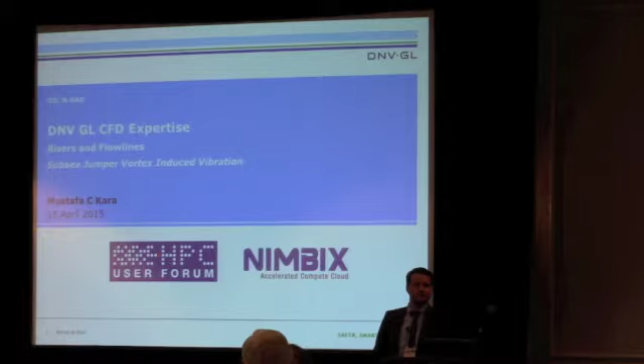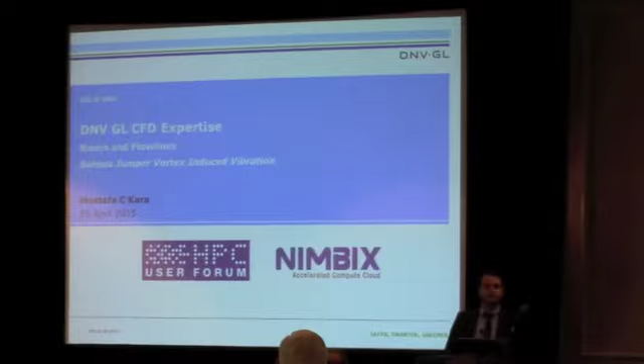I came from DNV GL. I am an engineer, basically a CFD engineer at DNV GL. We have an office in Houston, Texas, and we are in the oil and gas business. So today I'm going to talk about HPC applications. We used the Nimbix cloud system, cloud computing, for a couple of our studies that we have conducted through CFD.

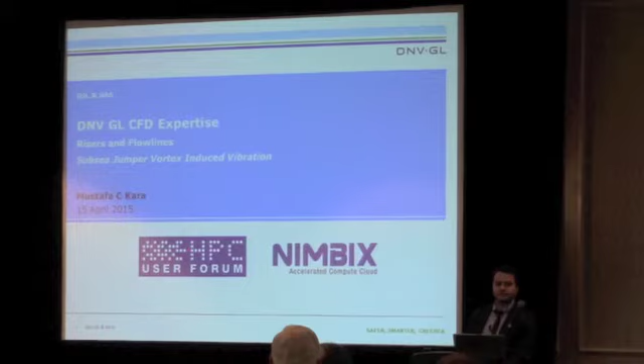My background: I was a PhD student at Georgia Tech, and I had a structural engineering background, did fluid-structure interaction, and got familiar with CFD and fluid mechanics during my PhD. Two years ago, I joined DNV GL. Now we have a riser and flowline section that does independent analysis and verification for subsea equipment. This is our first time at the HPC User Forum.

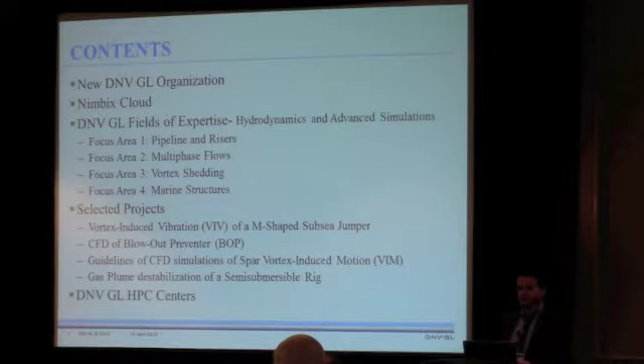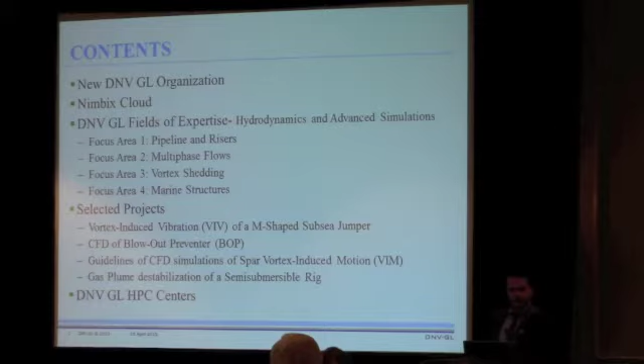I will first talk about DNV GL as an organization. Probably most of you don't know or have little idea of what we are doing. Then we'll move to the Nimbix cloud solution that we have used for a couple of applications, and our CFD fields of expertise on pipelines and risers, multi-phase flow, vortex shedding, marine structures. Then I will show some showcases through selected projects that we have conducted.

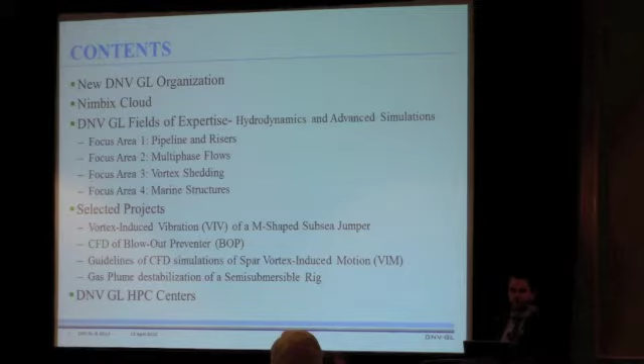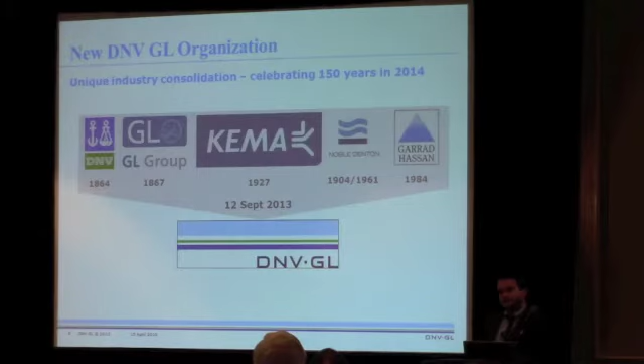Legacy DNV was headquartered in Oslo, Norway, and GL was headquartered in Hamburg, Germany. They merged in 2013. They include a couple of other companies like KEMA in energy, Noble Denton in maritime, and Garrad Hassan for renewables and energy. Now the company is called DNV GL. DNV GL is an independent organization, so we are third party verification. We do technology qualification.

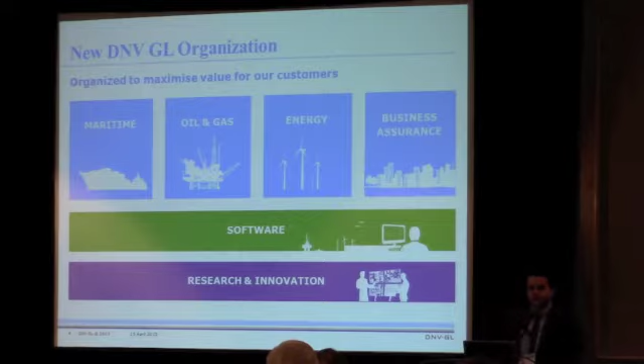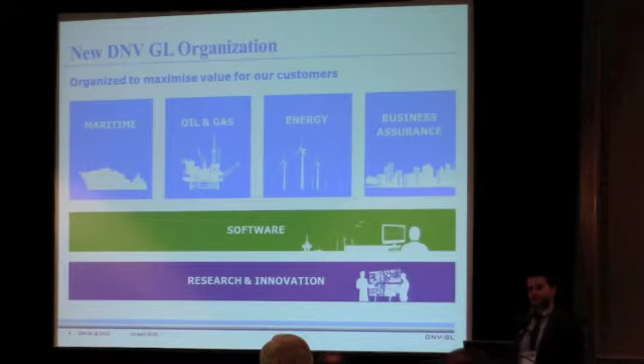We are in different units: maritime, ship hydrodynamics, stability, and transportation. Oil and gas, from the bottom of the sea floor to the topside of the structure. Energy, renewables, wind; you can think about wind turbines and wind farms. Business assurance, and DNV also has software. They have been using it for the maritime and oil and gas business. It is based on potential theory, not computational fluid dynamics. DNV is a unique organization that invests 5% of its revenue into research and development each year.

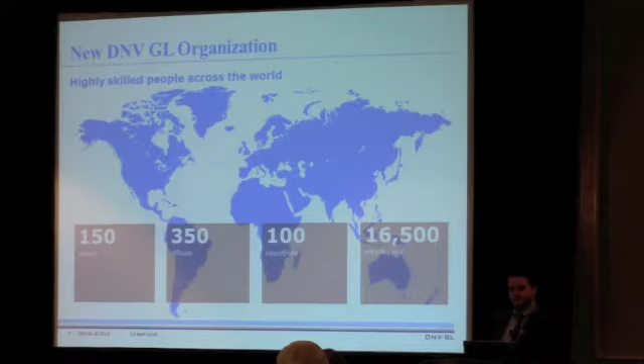DNV GL has been around for 150 years in the certification business. We have 350 offices around the globe, and now after the merger with GL, DNV GL has around 16,500 people.

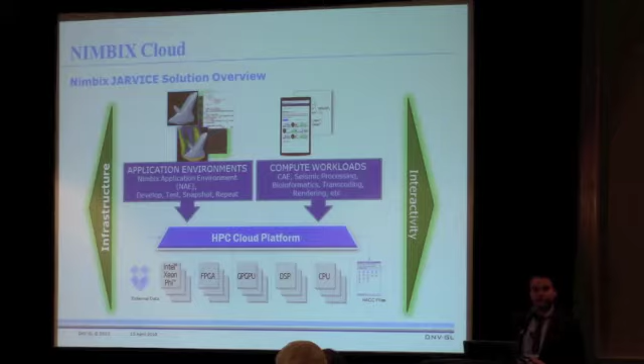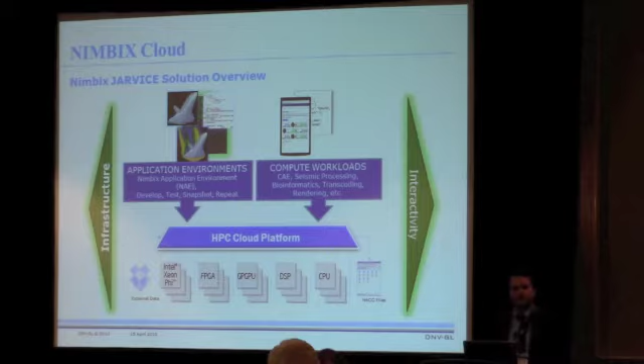Let me briefly talk about Nimbix Cloud. We had to run CFD studies, and of course big scale studies, and at that time we didn't have the computation power. Although we have the software, we didn't have the hardware. So we chose Nimbix Cloud because it was easier for us. They have a cloud operating system called JARVICE, where you can run your jobs in batch mode or interactively. It's a software as a service company for end users, so point and click applications.

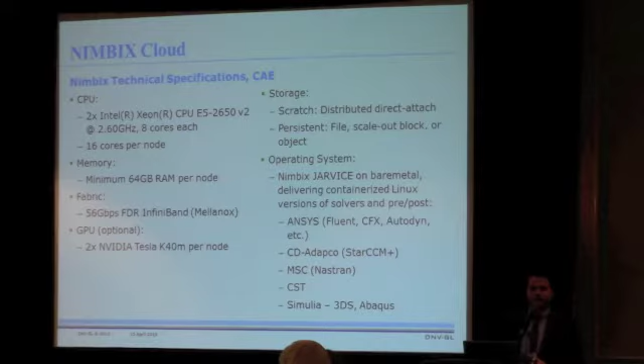Nimbix currently has 1,200 cores. There are 16 cores per node, and each node has 64 GB RAM. Through Nimbix JARVICE, we are able to run CAE software like ANSYS Fluent and CFX for CFD and STAR-CCM+ for CFD. Then we have Nastran and Abaqus for FEA and ANSYS Mechanical for FEA. Those are important because in the subsea environment, when you look into the behavior of structures, there's vibration. So you have to couple CFD and FEA through fluid-structure interaction.

Our first focus area is pipelines and risers. Risers are basically pipelines that take the oil from the sea floor and carry it to the top surface of the floating platform. There is a growing desire to install subsea equipment at deeper depths with loose support, which accounts for temperature effect changes and well growth.

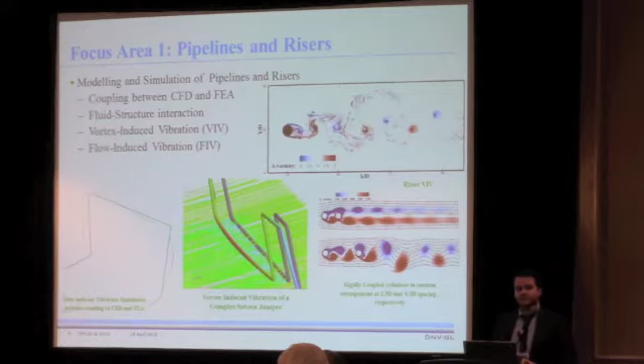When you have longer and deeper seas, now we are talking about 10,000 feet of sea depth, the riser length is increasing and it's very susceptible to vibration due to ocean currents and the motion of the topside platform. Vibration is very important because it may induce fatigue at the end of the day, which may cause collapse of the structure.

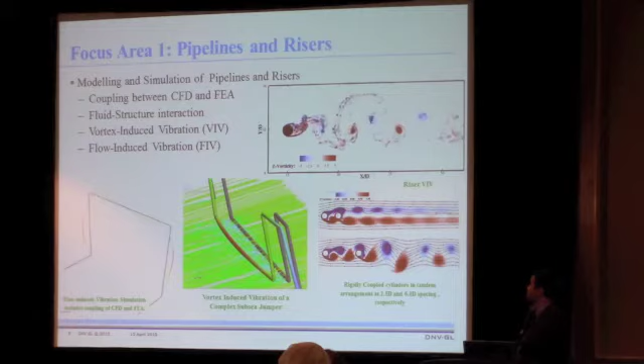So you can see here on the top right side, this is an example of vortex-induced vibration. This is a free vibration. Basically, the cylinder is moving in free motion, and the CFD solver and the equation of motion, which is a structure solver, are coupled two-way.

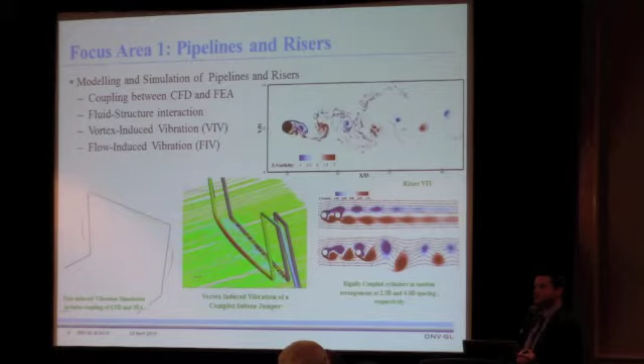So vortex-induced vibration occurs when the vortex shedding around the structure has a frequency. When this frequency of the vortex shedding equals the natural frequency of the structure, then the structure starts moving, basically vibrating. This is very important because this cyclic vibration may cause fatigue to the structure.

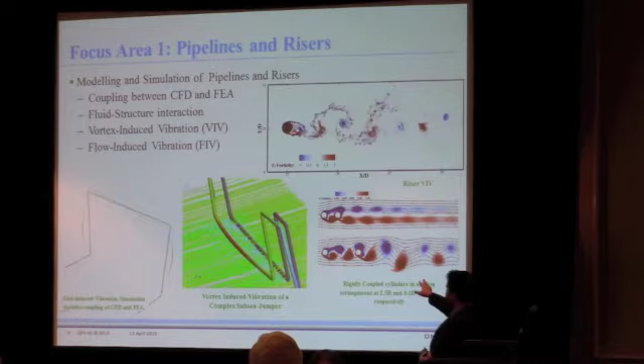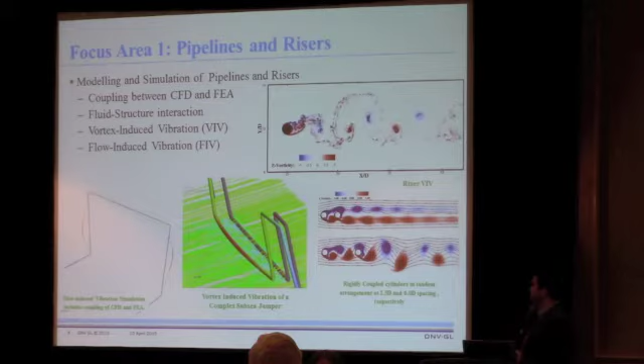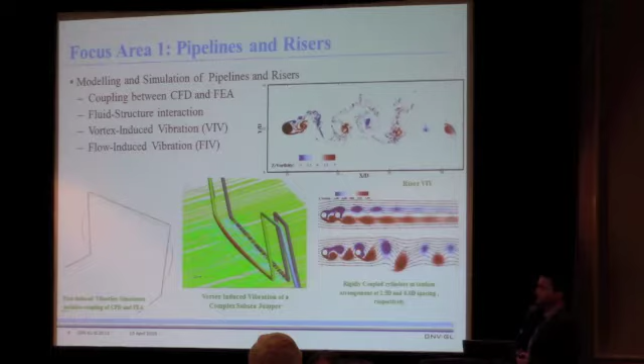So this is based on basic external flow, and you can think about cylinders in tandem. Those can also vibrate. But you also have flow-induced vibration, so there's also flow inside the pipe, right? The oil or the hydrocarbons. So when there's a slug flow coming into the subsea jumpers, the structure can also vibrate. Those vibrations are coupled using CFD and FEA solvers together.

Multiphase flow. The multiphase flow includes multiple components of flow, basically. You can have gas-liquid, external flow and internal flow. If you look at flow assurance, you are trying to investigate the asset integrity of your pipeline, because you don't want to stop the production, right? When the hydrocarbon gets into the pipe, there are other problems occurring, for example erosion or corrosion. You are able to model those problems, assess the forces and mitigate the problems using CFD by introducing better designs.

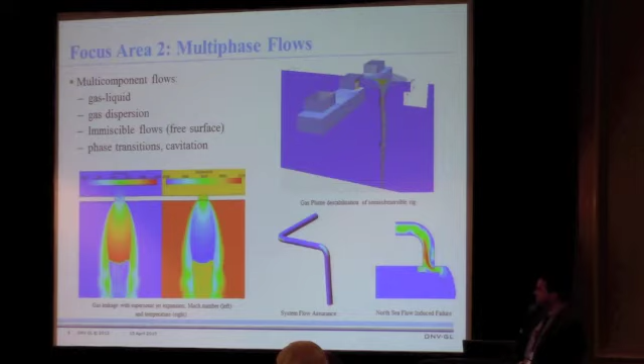So vortex shedding is our core business, and where our strength is, basically. Accurate predictions of structural integrity require accurate predictions of the loads on the structure. It requires highly skilled hydrodynamics professionals, and DNV is a very advanced developer and user of all types of software for predicting vortex shedding.

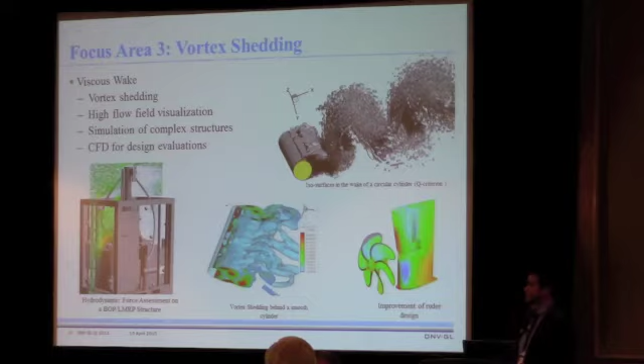Vortex shedding may happen on a simple structure like a cylinder, but the vortex is highly complicated to investigate because of the turbulence and turbulent boundary layers at different current speeds. Then, if you look at a complicated structure like a blowout preventer, assessing its hydrodynamics is also important. Because this blowout preventer is sitting on the wellhead, you don't want a well blowout. There's a huge structure sitting on the wellhead, and you have to calculate in the design the added mass forces or hydrodynamic forces acting on the structure.

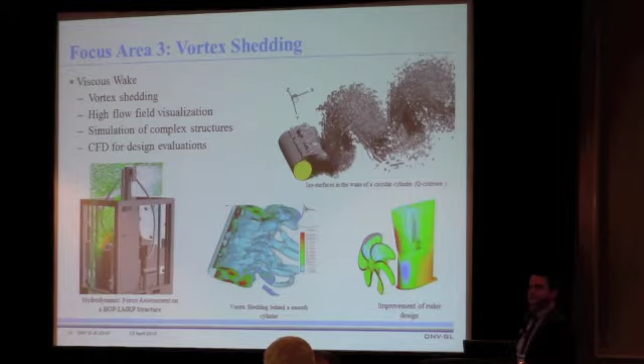You can do design improvements using CFD. You can see a picture of rudder design with different geometries, with different flow conditions. You can basically propose different designs of structures.

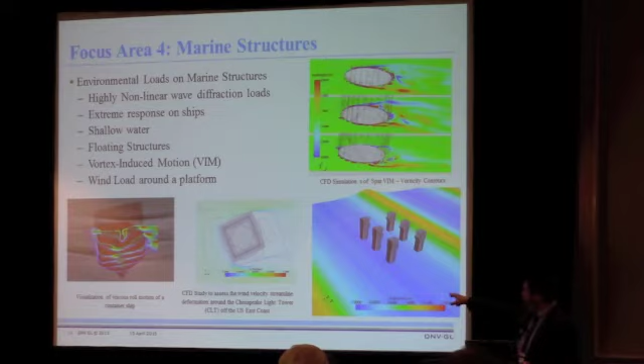On the bottom left, you can see a visualization of viscous roll motion. This is one degree of freedom motion of a ship interacting with the wave forces. In the bottom middle is a CFD study to assess the wind velocity streamlines around the Chesapeake Light Tower, which is close to here.

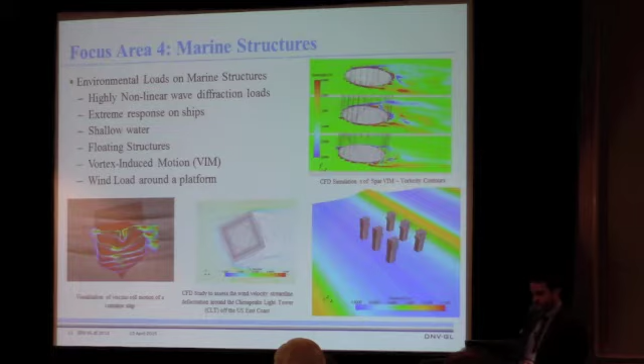So DNV GL has conducted a preliminary study for vortex-induced vibration of an M-shaped subsea jumper. We have conducted this study because our client ExxonMobil approached us with this challenging problem. Basically, they have run an experiment case. Let me just wait. So these subsea jumpers are connected to the Christmas trees or subsea blowout preventers.

So ExxonMobil has run a tow test for VIV response of this subsea jumper under uniform current, and they have experienced vibration. So this was a first of a kind model test so far on the jumpers. What we have done is an initial study to basically validate the experimental work with CFD. So we have used software called STAR-CCM+ coupled with the Abaqus FEA solver and tried to estimate the vibration amplitude. So this was an initial study.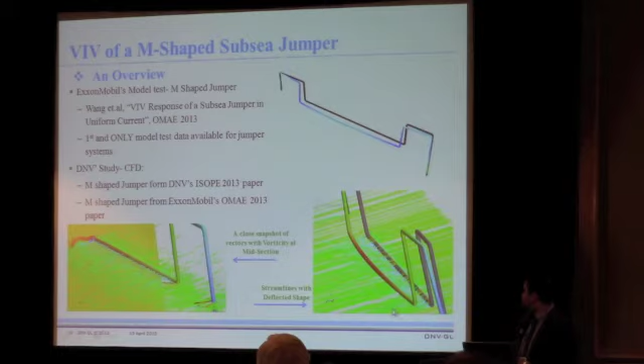This is an undeformed geometry of the jumper, and this is the deformed one, with the stress magnitudes on the jumper shown on the figure, when the current is hitting the jumper.

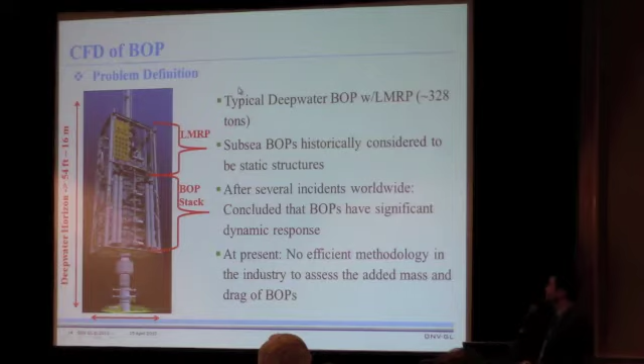Another study, again, a blowout preventer. A blowout preventer is a piece of safety equipment that is used to circulate kicks and control the pressure of the well. So basically the kick is commonly used to describe a phenomenon due to pressure difference when a high pressure formation is reached. And this basically generates an unfavorable pressure gradient that causes an influx of the fluid. So a blowout preventer, as the name implies, is sitting there to prevent these kicks and prevent the blowout.

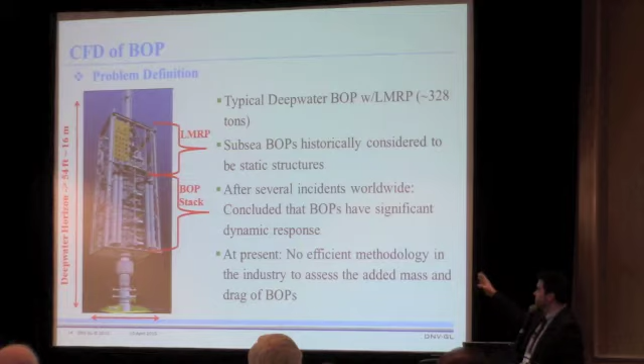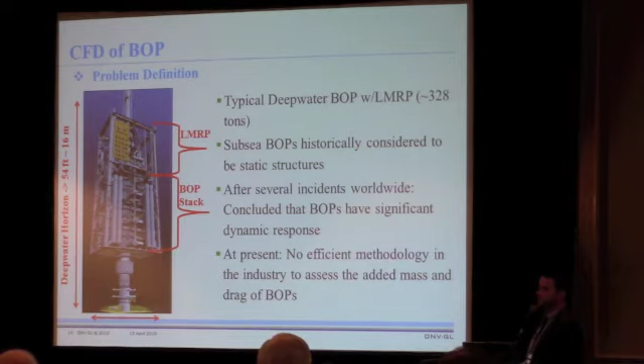So a typical blowout preventer, if you see, this is the Deepwater Horizon accident after BP's investigation. It was 16 meters tall, or 54 feet, so it's a 4-story high blowout preventer. Those structures are around 300 tons sitting on the wellhead. So we have found out that the BOPs have significant dynamic response. Those investigations were done after these accidents. And at that moment, there was no efficient methodology to assess the forces on these blowout preventers.

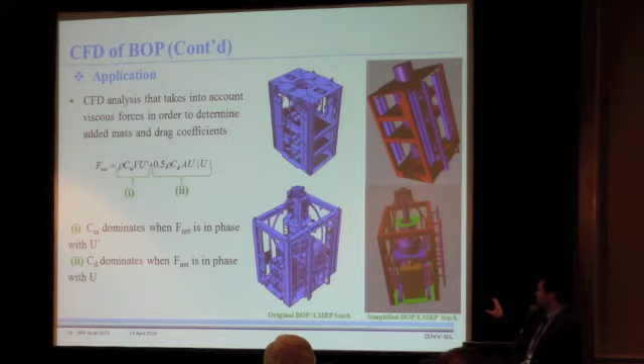So one way to assess is, of course, you run a CFD analysis, but post-processing is also important because the net force acting on the structure is a combination of added mass, which is the inertial component of the force, and the drag force, which is basically the viscous forces acting on the structure.

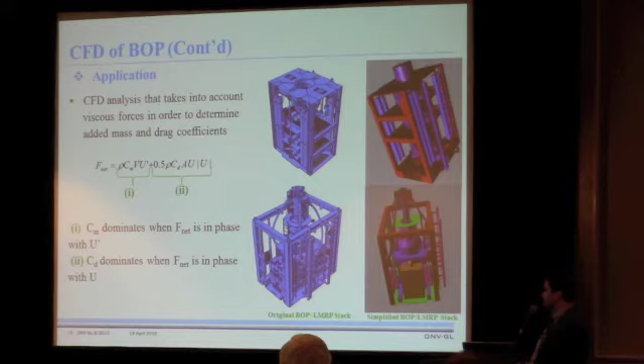So initially we have done 12 million cells. When you talk about the domain, that's all the fluid around the structure. But then we extended to 70 million cells. Then we started exploring how we can run this, because at that time we didn't have the hardware, the CPUs, so we approached Nimbix and used their cloud solution. We used up to 1,000 cores, and for a steady case it takes around 3 hours, but for an unsteady and moving structure deformation, it took a couple of days.

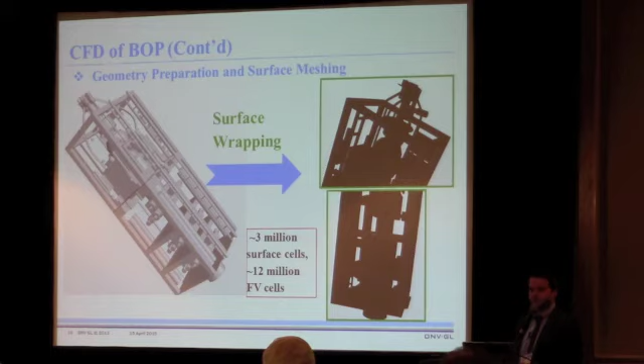So post-processing, there's some flow visualization. This is a complex structure, but the flow around it is also complex, depending on the current acting on the structure. So you have a highly turbulent flow. And the flow is also interacting with the structure. So the vortex shed from one part of the structure is merging with another vortex structure from the other part of the domain.

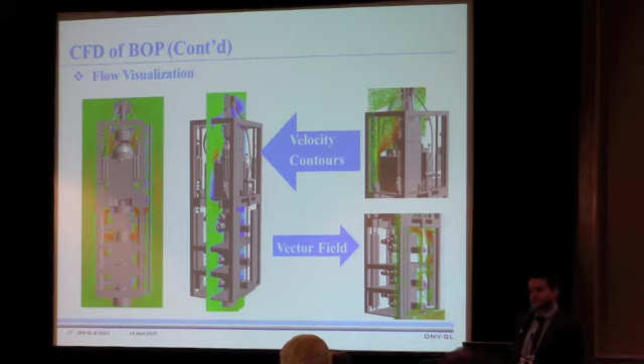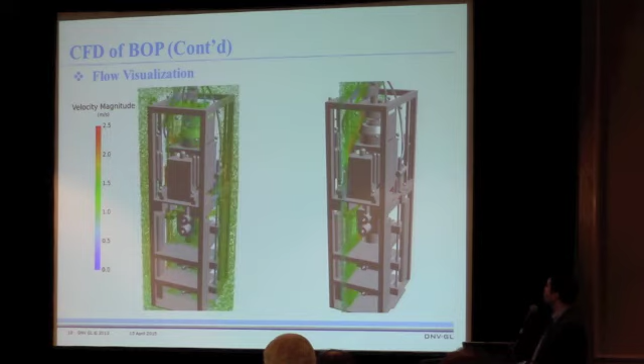So on the left, this is the velocity magnitude, and on the right is also the velocity magnitude from a different angle of view. You can again notice that there's a high velocity and around the wall inside, and it's causing some vortex, and vortices are basically interacting inside.

So vortex induced motion, when it comes to a platform, and the platform moves due to vortex, they call it vortex induced motion. This is published data, and we have also published in one of the OMAE conferences, and validated our CFD work against experiment.

VIM occurs as a consequence of exposure to strong current, especially such as loop currents in the Gulf of Mexico which are known to be very high. VIM is one of the critical factors in the design of mooring and riser systems.

The paper describes a set of VIM CFD simulations in different scenarios. The current is acting at 30 degree, 60 degree, and 90 degree to the spar. There are 3 scenarios. So reduced velocity is a function of the velocity of this current and the natural frequency of the structure.

Basically, at a certain reduced velocity range, you may have vibration. So for a pipe, for example, reduced velocity 4 to 8, you can have vibration. But for complicated structures, the physics are also getting complicated, so you cannot represent a spar with a pipe, because a spar has all those other strakes around it, and other apparatus that may change the place of the boundary layer.

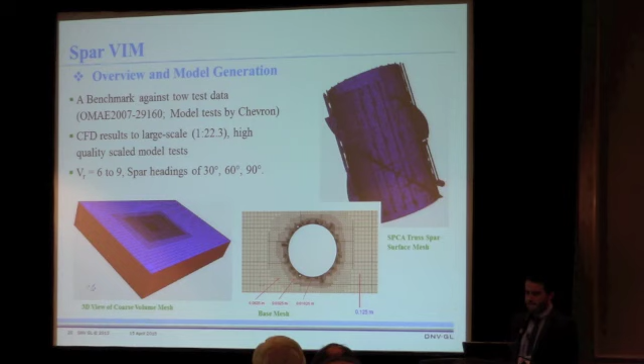But with the base mesh that we have used, we were able to predict the tendency, especially after higher reduced velocity, there is a decrease in amplitude. So we were able to capture this using CFD. We used the Spalart-Allmaras DES model to capture the vortex induced motion.

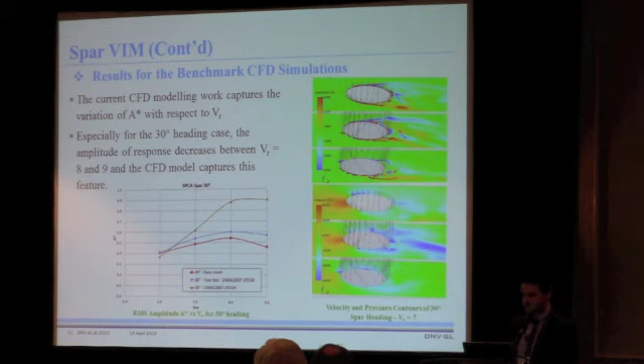This is a gas plume stability problem. As I mentioned in the earlier slides, the objective is to assess how a gas plume formed after a pipe leakage from a pipeline on the seabed will impact the semi-submersible stability or operation.

We have used an Eulerian volume of fluid method to capture the multi-phase flow. What we have done is that after running this CFD simulation, we take the forces and do a dynamic analysis using one of the potential theory solvers.

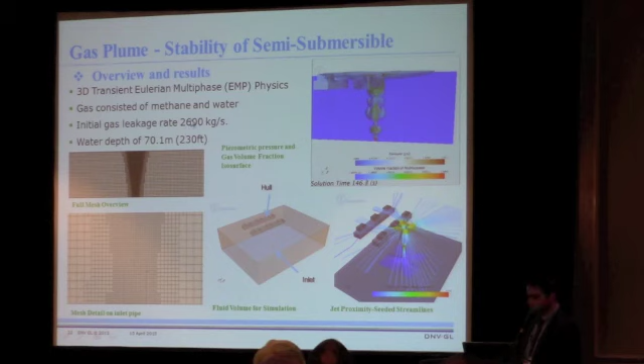DNV GL has different HPC centers, one being in Hamburg and the other being in Oslo. Hamburg has 7,000 cores and Oslo has 2,000 cores. Those computers are dedicated basically to computational fluid dynamics. And in Houston, we recently got approval to have a 1,200 core Cray, so hopefully we will be getting and running safety simulations on this cluster.

Again, we have expertise in fluid structure interaction and hydrodynamic load analysis. And that's all about today's presentation.